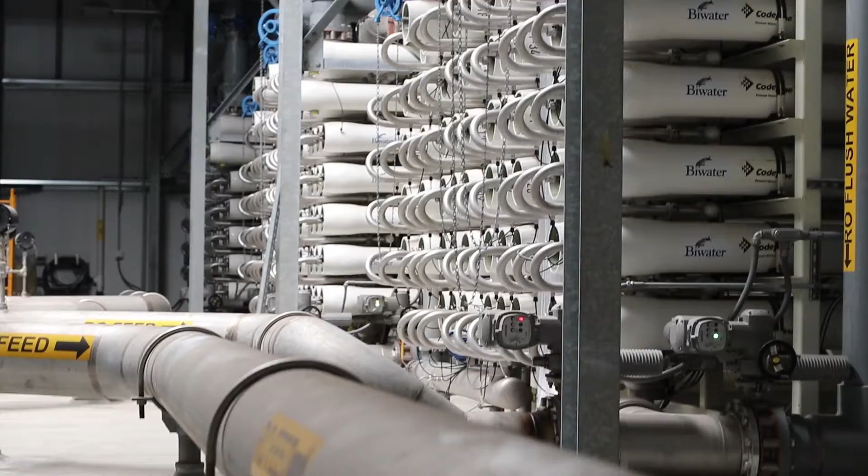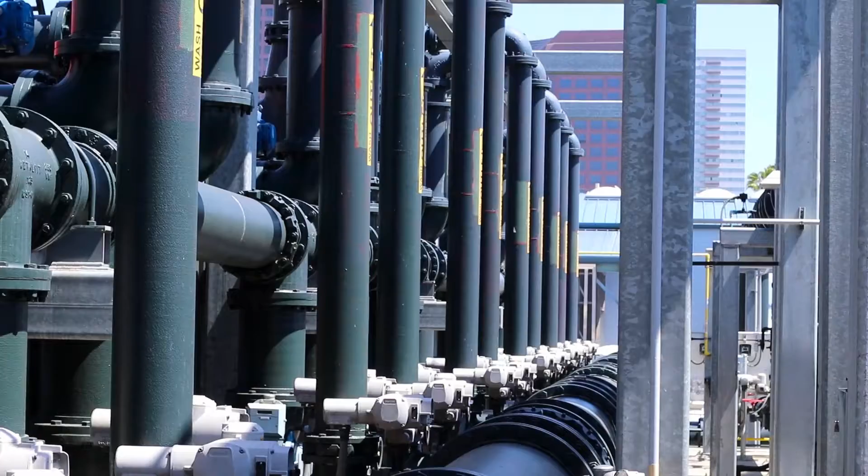I'm standing here at the Santa Monica Water Treatment Plant, a plant that provides over 10 million gallons of drinking water for its businesses and residents. Water is one of very few vital needs for us to survive. It regulates our body temperature. It participates in the biochemical breakdown of what we eat. It helps us remove pathogenic waste from our body.

Water, a fundamental element, a natural resource that has innumerable life applications, but more often than not, we have little respect for. In the mid-90s, Santa Monica's water wells were infected with potentially life-threatening toxins that could have caused catastrophic damage to our drinking water supply. 27 years ago, the water wells in Santa Monica were marred by a chemical known as MTBE, an additive found in auto fuel.

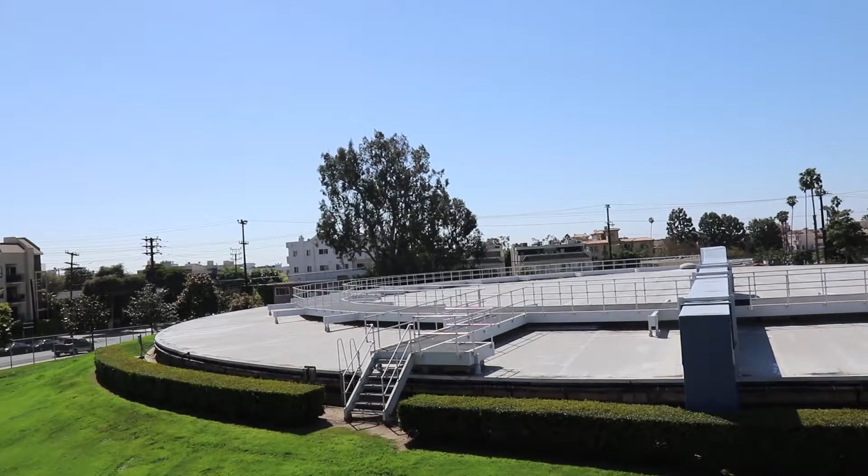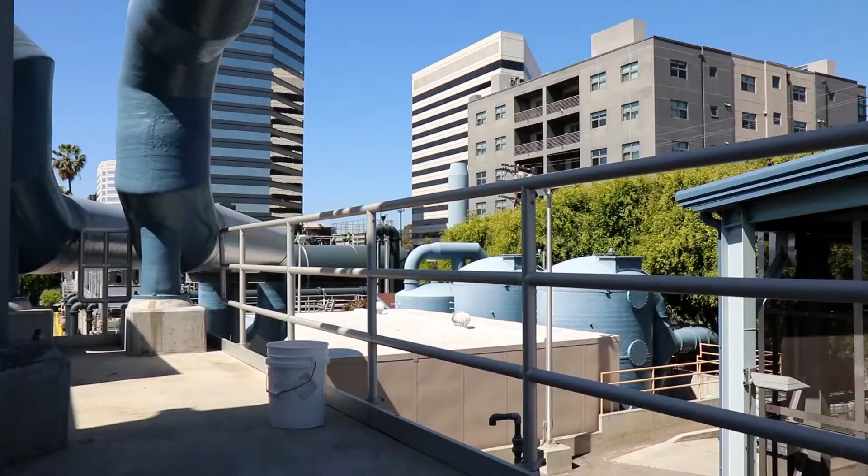In 1996, 5 wells located at the Santa Monica-owned well field were shut down when testing revealed a chemical known as methyl tertiary butyl ether, MTBE, was found in the water. To meet drinking water demands of the city's residents and businesses, the city had to import over 80% of its water supplies from the Metropolitan Water District.

The gasoline additive MTBE, why was that used in gasoline? The Charnock fields, we have 5 wells, and we have had hits of MTBE, which is methyl tertiary butyl ether, which is an additive to gasoline, which makes gasoline burn cleaner. It worked well with the cars, the gas burned cleaner, but no one ever anticipated that this would get into the water system.

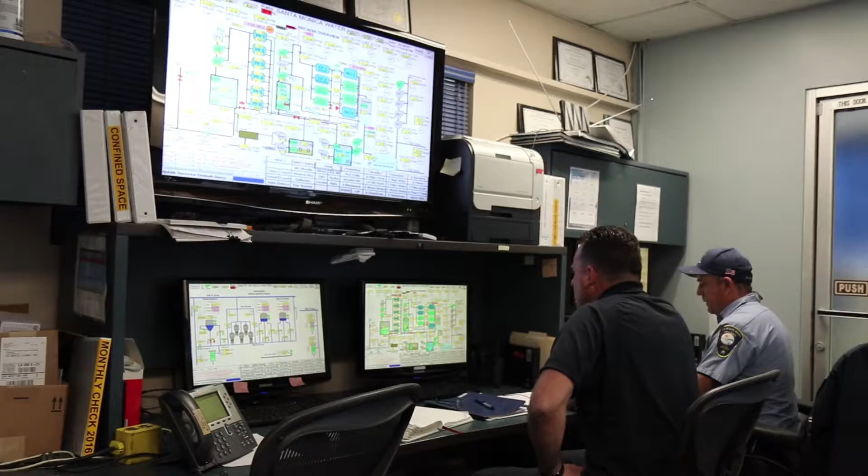We found it in the 90s, and around 1996 to 97, we were getting large demands of chlorine in these wells, and we couldn't figure out why it was happening. The water was sent out for analysis at independent labs. It came back that we had MTBE. An arduous litigation between the involved oil companies and the city resulted in a settlement of over $200 million. This provided some funding to design and construct a state-of-the-art water treatment facility.

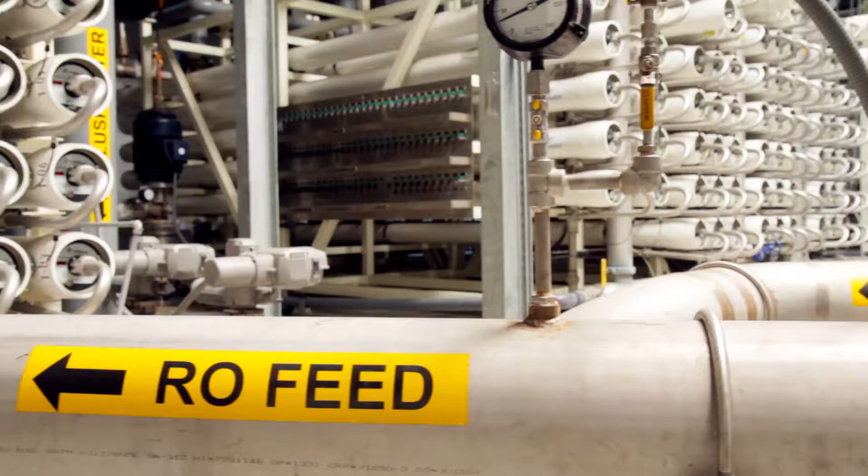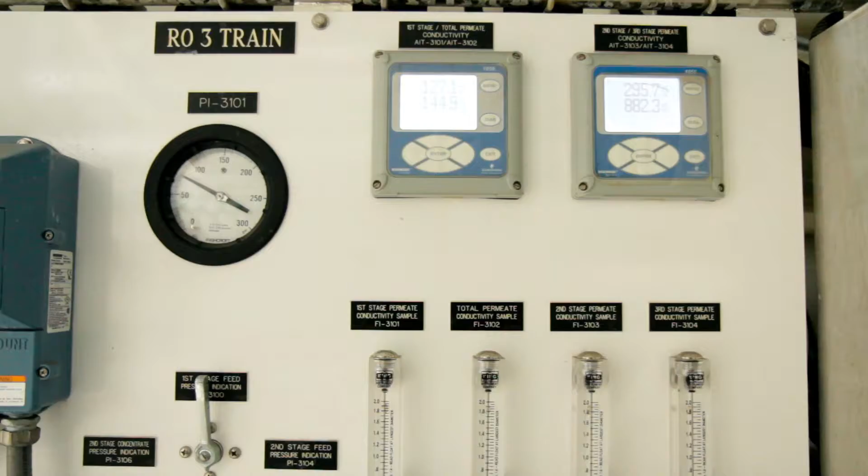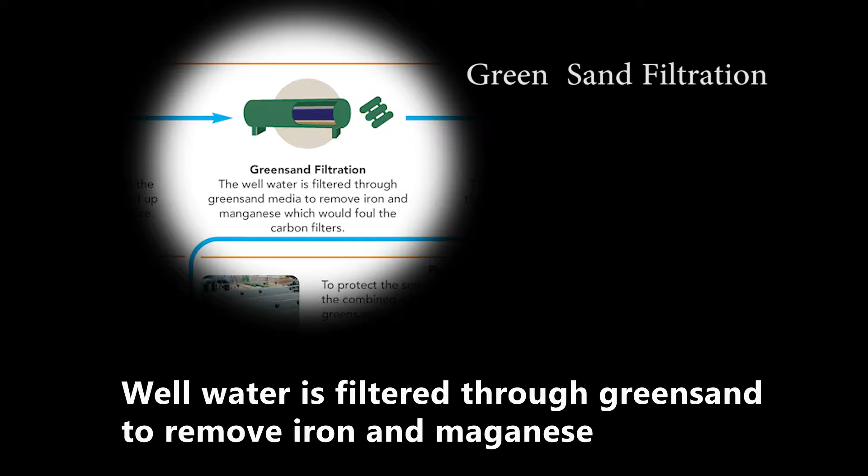The rigorous filtration process by which the water is treated before we can drink it is profoundly complex. Here, Jason Diugi, water quality analyst of the Santa Monica Water Treatment Plant, shares with us the process. The very first one is the green sand filtration, and that's really because we have naturally occurring iron and manganese in that water, so we treat that first, and then it goes through GAC. That's short for granular activated carbon, and that is the technology that actually adsorbs the contaminant MTBE.

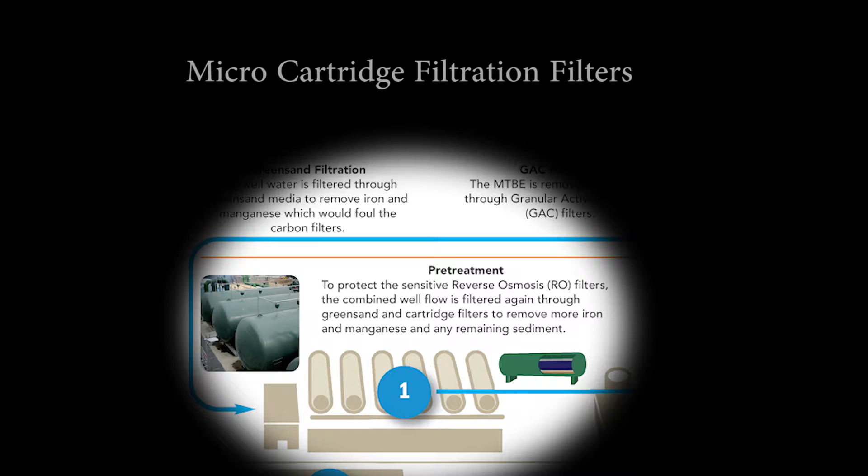So I'll give you visually what's going on inside of these green, huge cylindrical vessels. The water percolates through there, leaving behind the MTBE bound inside of the GAC. And then from there, there's a transmission main that comes from that plant all the way to here to the Santa Monica Arcadia treatment plant. After that, it goes through small cartridges to further filter out. It's like a pre-treatment that we have before it goes into the reverse osmosis membranes.

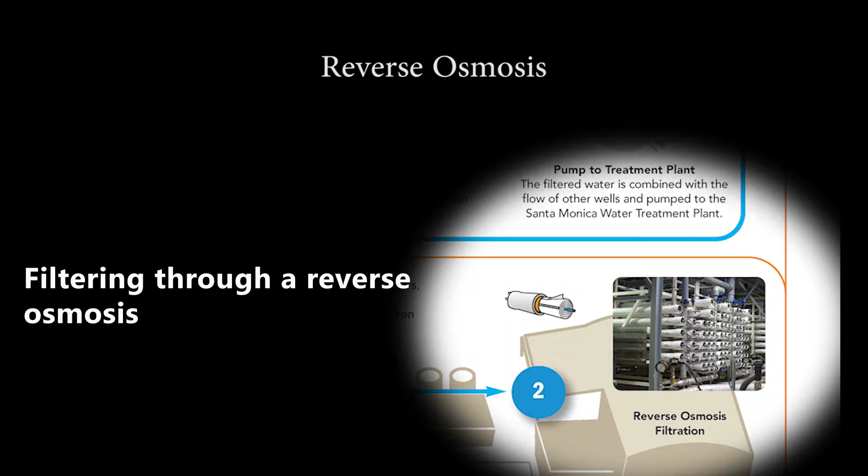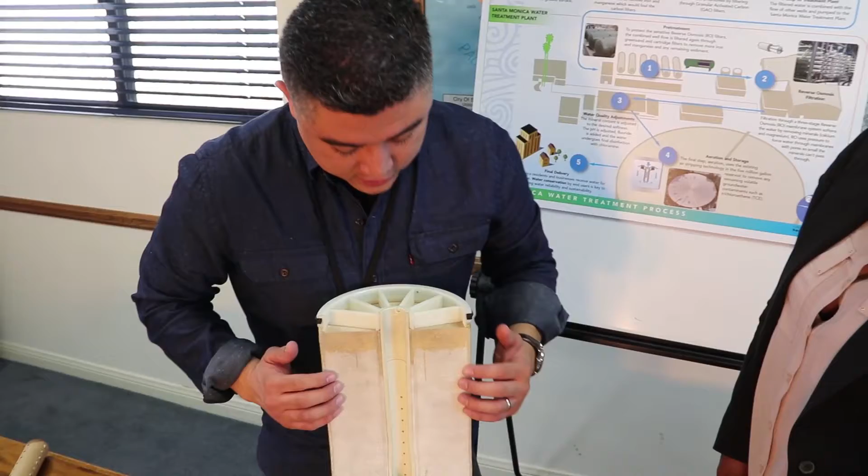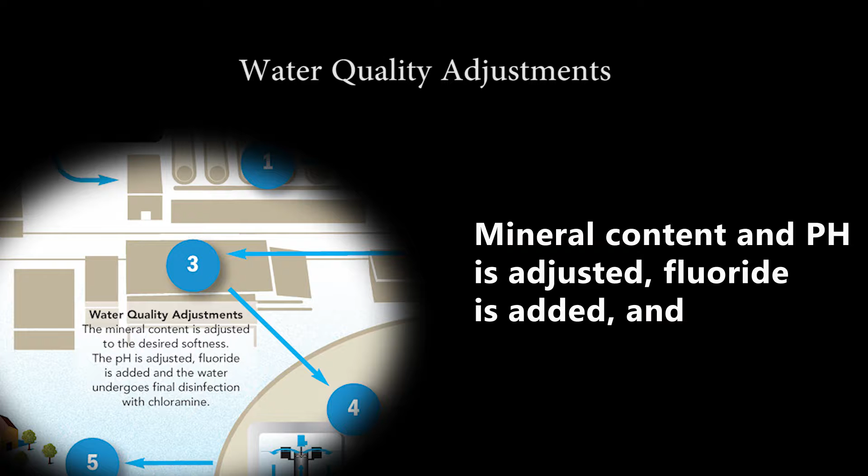The way that it works is the water comes through this outside layer here, through these triangular channels, and it goes through a netting type of material. Right. And as we use pressure, that water will, through these different channels, squeeze and push through the osmotic pressure through the permeate channel and is collected finally at the end. And then after it goes through the reverse osmosis treatment membranes, it goes through decarbonators and air strippers, and that removes any volatile organic compounds from the water utilizing air. So it's like a rain shower that comes down.

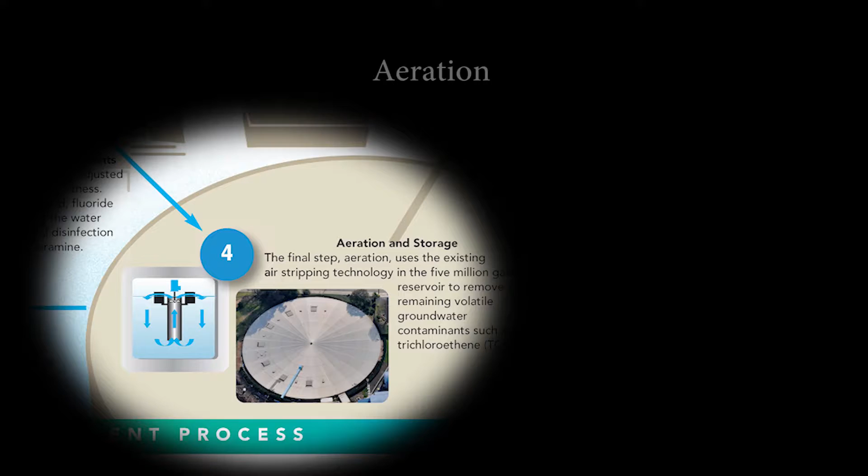And then after that treatment process, it's injected with disinfectants and mineral counts that we have to provide as required by law. And then it goes into our 5 million gallon reservoir, which continuously also gets exposed to air because we have weirs in there that continually do that. The water that comes from the treatment plant is held at a higher standard than bottled water. Bottled water is regulated only by the Food and Drug Administration.

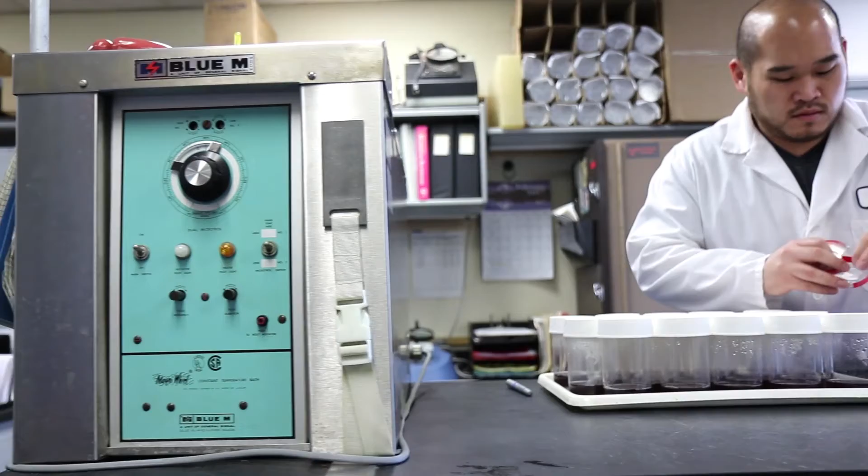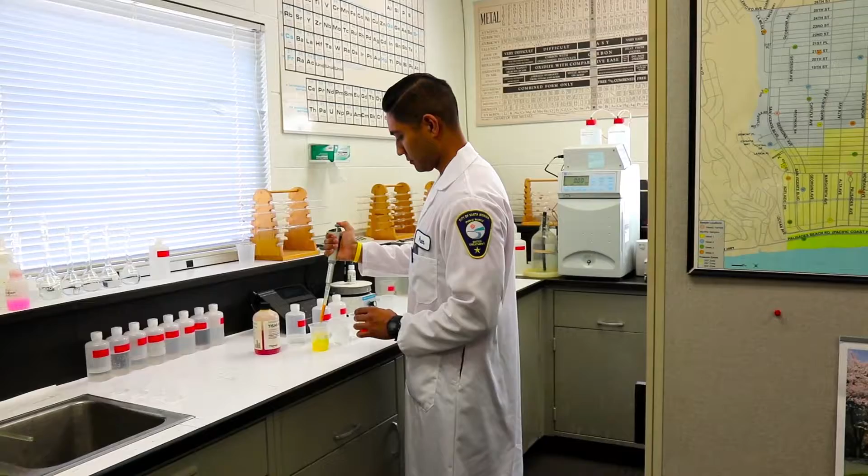Santa Monica water is rigorously regulated and must meet state, federal, and EPA guidelines before you can even take a swig of it. Highly skilled laboratory technicians operate over 800 tests a month to constantly assure clean water. The amount of tests conducted surpasses all state and federal guidelines. For the past several months, we have experienced quite a bit of rain. Is it okay for us to use water again freely and with reckless abandon? Why conserve, and if so, how?

Even though the media is right now telling us that we're out of the drought, people should still conserve water, because this is going to be a circular cycle. We're going to have years that the water is going to be scarce. So if we conserve now, we will have water for the future. Collectively, we can make a very big difference by making small little changes at home.

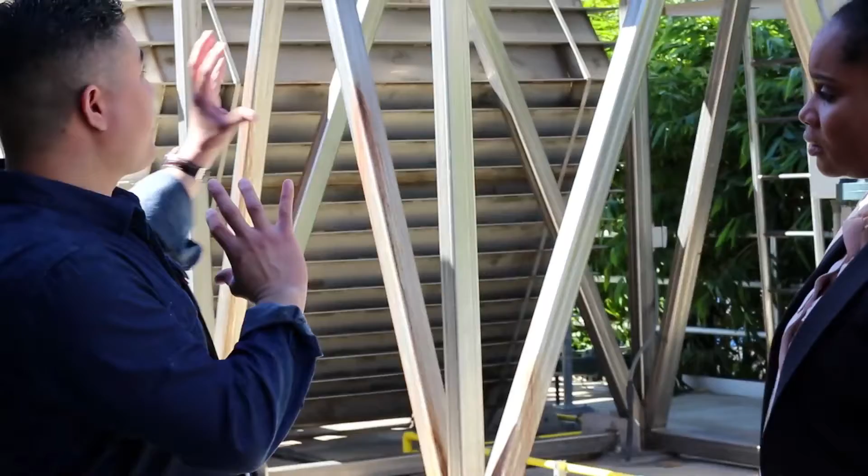And those small little changes can be turning off the water when you're brushing your teeth, taking shorter showers, using drought-tolerant landscapes, watering less on your lawn, low-flow toilets, changing your shower heads and faucets. Got it. Save our water. Even with all the advanced equipment and the intensive filtering process, the success of the water treatment plant is highly due to the staff.

We often take for granted our access to clean water. It provides us life. Despite our unusually rainy season, it's vital for all of us to do our part and continue to conserve our water.